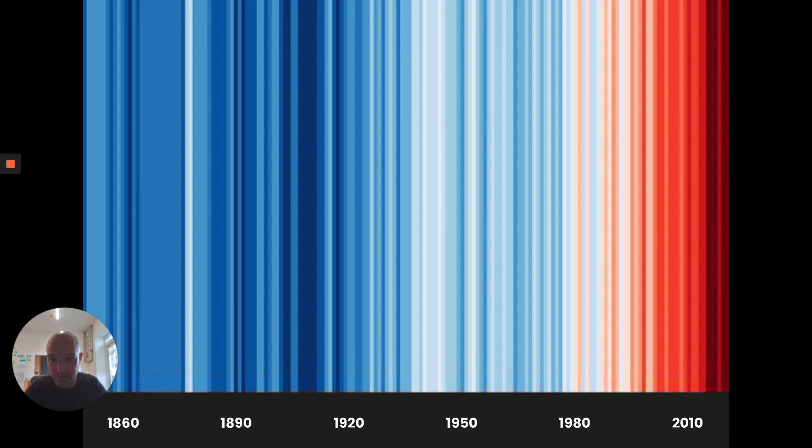Last year, we had the worst drought in Europe in over 500 years, leaving the continent scorched. And last week, we had the hottest day on record globally, followed by a new record hottest day, altogether making it the hottest week globally ever recorded. So climate change is beyond any shadow of a doubt real, and it's accelerating rapidly.

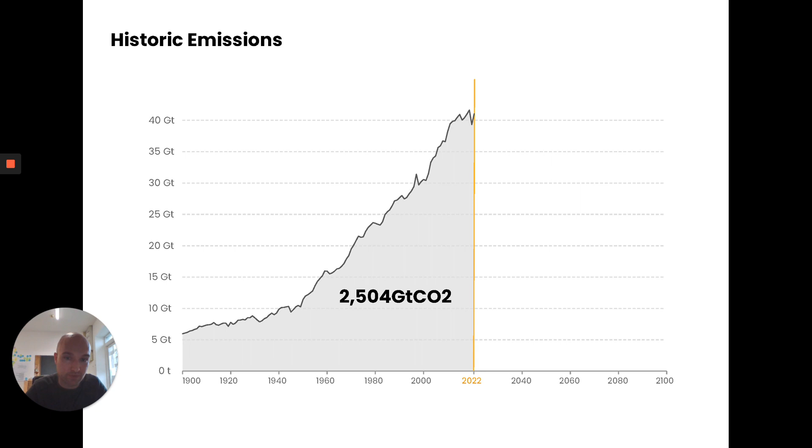The reason for this is that since the Industrial Revolution, we've pumped over 2,500 gigatons of CO2 into the atmosphere. At our current rate, according to the IPCC, we would exceed the 1.5 degree threshold, which is considered a minimum to minimize the worst effects of climate change, within 9 years. If we are to stay below that target, we need to rapidly decarbonize our society, across the globe. So we need rapid reductions in carbon outputs, basically globally becoming carbon neutral by around 2040, which is earlier, as you may be aware, than many of our targets and plans account for.

If everybody was to pollute and emit emissions the same way we do in Ireland, we would only have 5 years within which to exceed the 1.5 degree target, and 18 years to stay within the 2 degree target, which is, by all accounts, a sort of catastrophic depiction of the future. Relative to other European countries, we're the second highest emitter, and if you account for anomalies in the way Luxembourg's emissions are accounted, you could say that we're the worst emitter in Europe.

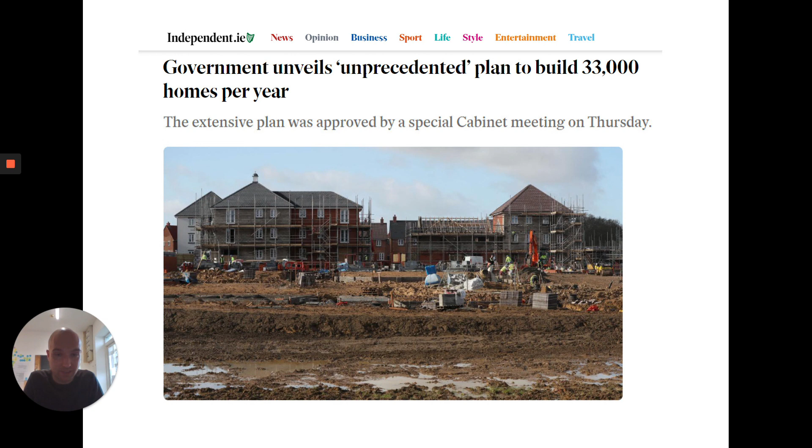with other estimations of up to 50 and even 60,000 between now and 2050 being needed. If we look at how we've built over the last decade, typically it has been the 3-bed semi-detached house, which contains around 40 tons of carbon. If we were to build that way in response to the housing crisis, that would be 33,000 homes per year using that typology, and over 8 years we would reach 10 million tons of carbon. So that's a huge output of carbon when we need to be dramatically reducing our emissions.

Now, in terms of transport and linked to the dispersed population that we have, we can see that Ireland has nearly 21 kilometres of road per 1,000 people. The European average is just under 10 kilometres per 1,000 people, and the German average is nearly 3 kilometres per 1,000 people. So by those figures, we're the highest in Europe, and we're the highest by a sizable margin.

Because of that, and because of a lack of public investment, our public transport provision is very poor in urban areas, but particularly in rural Ireland. Add to that the fact that we have some of the highest transport fares in the world, and that the service is unreliable, and it's no surprise that the Irish have the second highest car dependency in the EU.

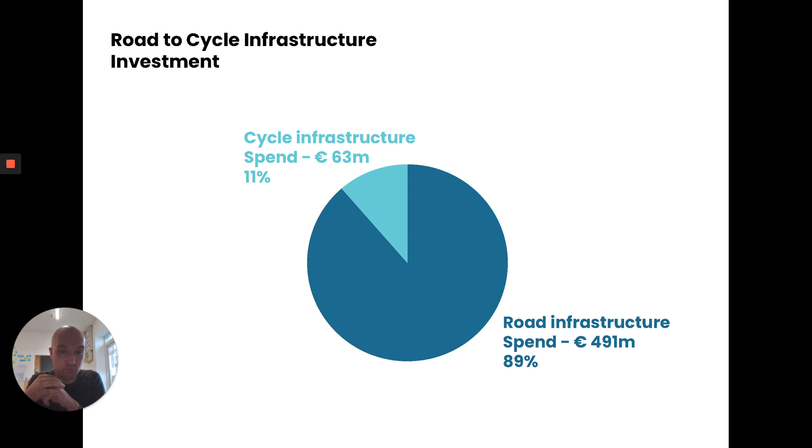Ireland's near 10% investment in road or cycle infrastructure is at a historic high, but despite that, only 40% of that funding was drawn down last year. So there's a mismatch between our climate ambitions, where we're putting money, and how that's being applied on the ground. As well as that, when we do build or consider cycle infrastructure, we often think of it as tourism infrastructure rather than essential mobility infrastructure.

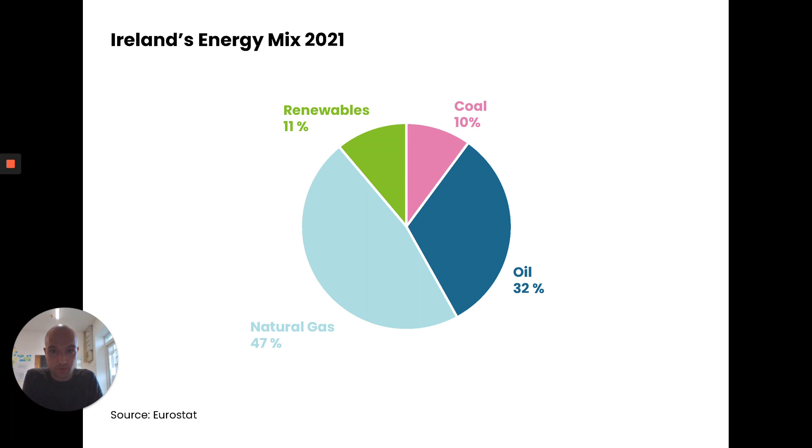The next point is energy. Having a look at our overall breakdown, we can see that 11% of our energy comes from renewables. To put that in context, in relation to our 2030 targets, we have some of the lowest application of that across the EU. That's despite the fact that we have some of the highest wind potential in the world, especially offshore.

We haven't seen a take-up in solar cooperatives the way we have in other European countries like the Netherlands or Germany, and these cooperatives can provide sustainable finance to local communities. We also see that the agriculture sector in terms of energy is being untapped relative to our European neighbours. The potential to increase anaerobic digestion should happen quickly and could have a major positive impact for our agricultural communities, also with the added benefit of reducing waste.

So the next topic, naturally moving on from that, is agriculture. If we look at Ireland's land use, 2% is artificial, so that's roads, buildings, other infrastructure. 13% is forest, and included within that are areas of nature or natural areas. 15% is wetland, 2% is water, and the remaining 67% is for agriculture. Of that, around 2% is used for vegetables, 4% for cereals, and the remaining 60% is for pasture or grassland, so that's for grazing sheep, for grazing cows, the larger livestock animals predominantly.

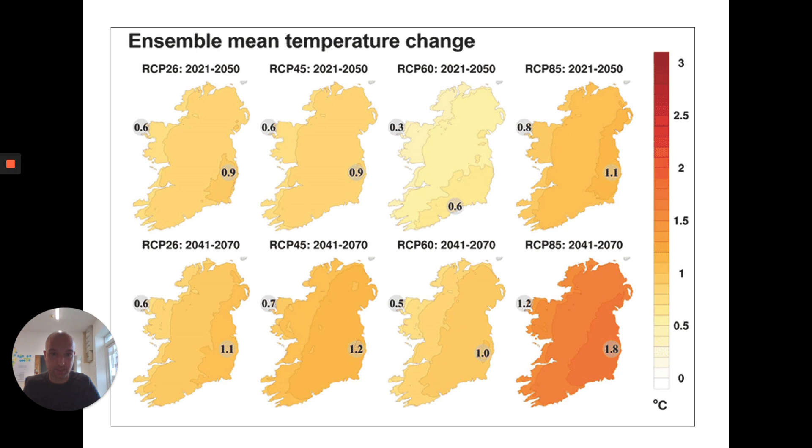We know that Ireland's temperature is rising at current rates. By the time we hit 2050, we'll have a similar annual temperature to what they have in Brittany in France. We're seeing radical and fast change in this space, and we will need to adapt to it. We also will need to adapt to the fact that population in Ireland is going to increase by about a third from 2017 to 2050, and that will be the second highest increase in Europe.

So where can we go from here? There are two major forms of practice: degenerative, harming the Earth's ecosystems and its ability to support life, and regenerative, repairing the Earth's ecosystems and its ability to support life. Within that, we have conventional, which is within the law. We have green, which is less negative impact. We have sustainable, which is doing no harm, also doing no good. We have restorative, which is contributing to nature, and we have regenerative, being part of nature.

We've taken those four key areas and given some examples of types of practice that could be considered degenerative or regenerative. Within degenerative, you might be surprised to see things like electric cars, public transport - once they consume a lot of materials and are extracted from the earth, they're degenerative. So even public transport, if that's not electric and renewable electric, is having a negative impact, albeit much less than car and private car transport.

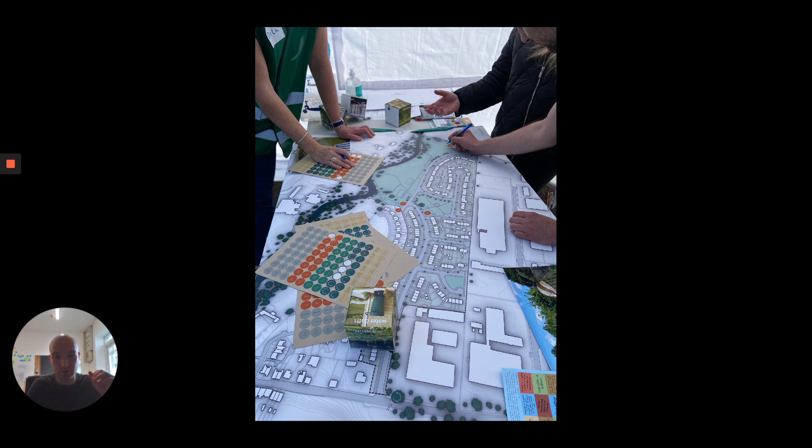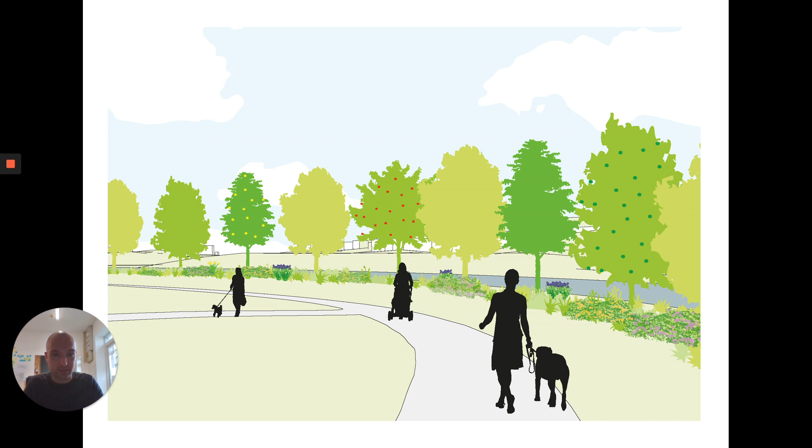We ran a number of co-design workshops, three in total, where the community engaged with us around the topic of climate change, highlighted the constraints and opportunities that existed within their estate to respond to it. We mapped all of those, and then the ideas that were developed, we produced visuals for them to communicate back to the residents what we had understood. These images were then taken and evaluated and eventually scored to understand what was going to work in the context of the housing estate and what was going to work for the residents.

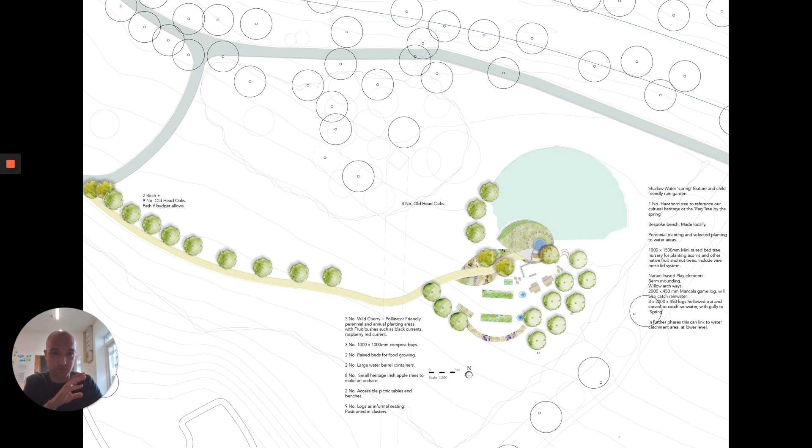Finally, two were shortlisted. They were evolved further, and that design was drawn up over a period of two months and constructed. This was a project of the community, building their knowledge and understanding of climate, but also responding to their needs.

This is how the project currently looks. You can see it's starting to wild out. We're getting pollinator plants blooming, we're retaining water on site, we've created public space, and we've also created the potential for the residents to grow collectively, and they've been taking that up.

The project was nominated for a new European Bauhaus Award, and amazingly, we were the first Irish winner of one of these awards under the category Reconnecting with Nature.

A site like this, which is in many ways common to a lot of Irish towns, has the potential for infill development, for reuse, for densification of our urban towns. The building itself was originally constructed in the 1920s, had a commercial space below with residential, the family living on top.

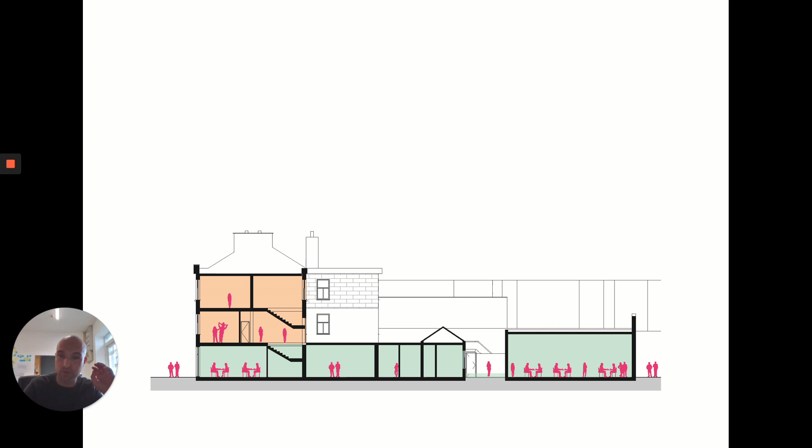The main moves we made urbanistically: on the ground floor, we can see that commercial space below is already active, so we extended that activation towards the old military barracks. We also brought back those above-shop units, so reusing the existing structure.

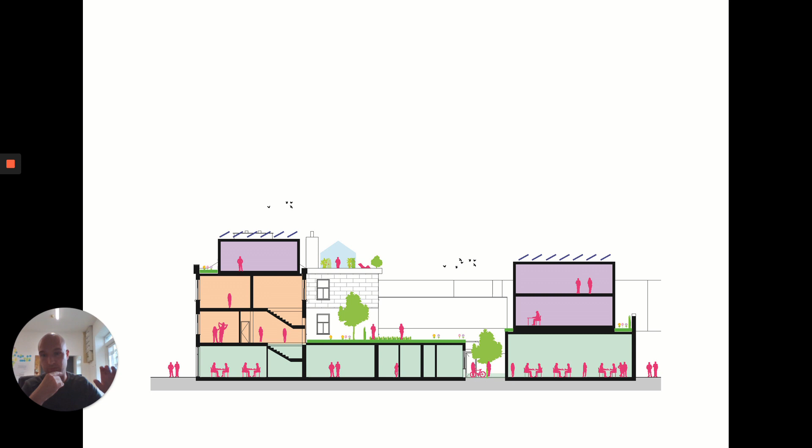In addition to that, we looked at bringing the qualities that people currently aspire to: the open space, the green areas, the potential to grow on site, and brought those into the centre of town. So you get a sort of vertical stack of urban to suburban as you move forward.

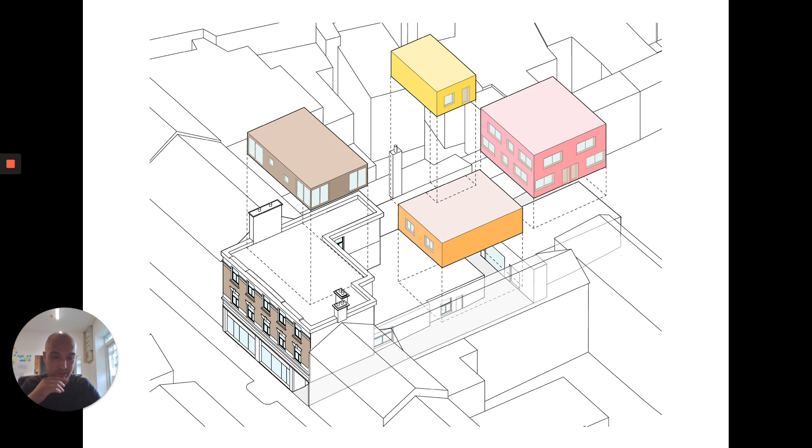We propose a new pedestrian connection through the site, bringing in multi-generational living units, so a variety of different types to support different age groups and people at different stages of life. And that's all connected through a network of green spaces with public amenities that the residents would share.

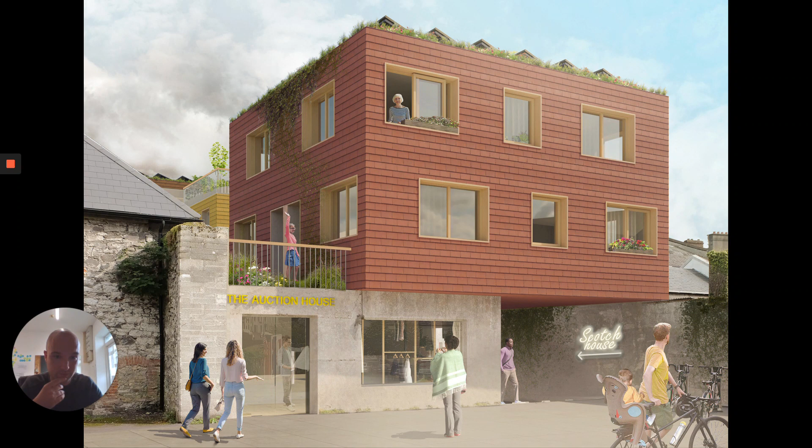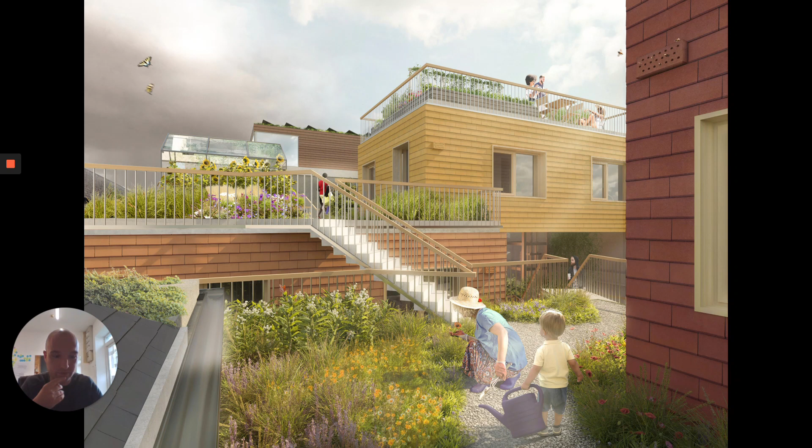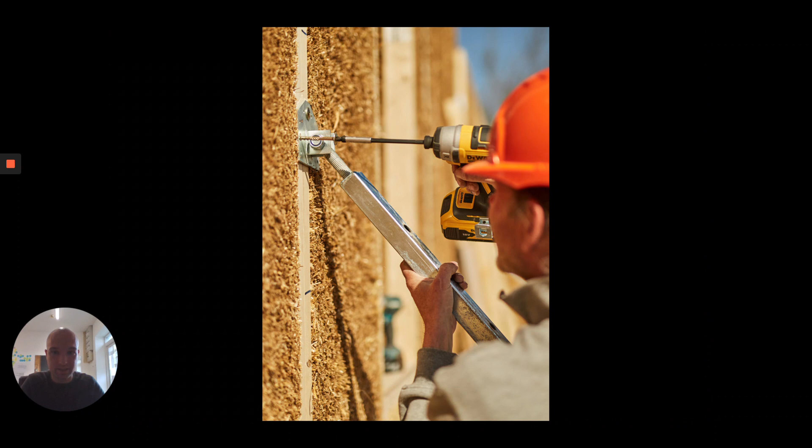This is a view from that military barracks site, a view from the laneway looking up, and some of those shared gardens. The project is proposed to be made out of a straw panel system that's easily mounted, put into place, and can be demounted, so the whole thing is potentially circular.

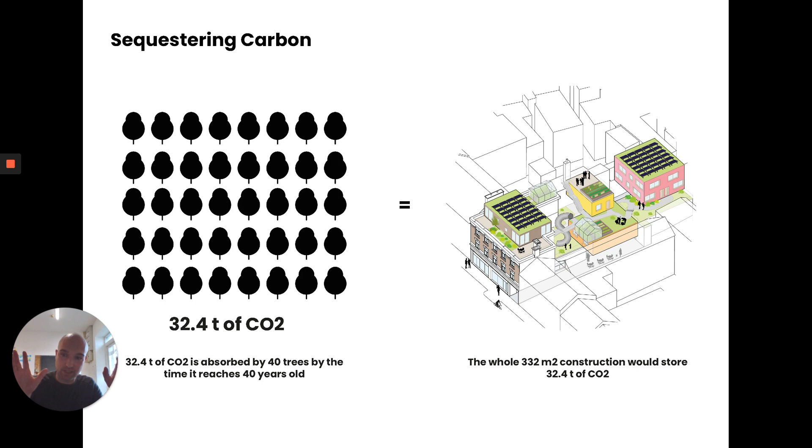In terms of carbon, the project sequesters around 32 tons of carbon in total. That's taking the panels, but all of the other elements of construction around it. It levels out at 32 tons of CO2 being stored, versus what would be around 400 tons of CO2 emitted had this been built out of block or concrete construction.

Even in terms of the finish, we were looking at the principle of circularity, linking to the historic context, but reinterpreting that clay material as a tile that can be reused in future.

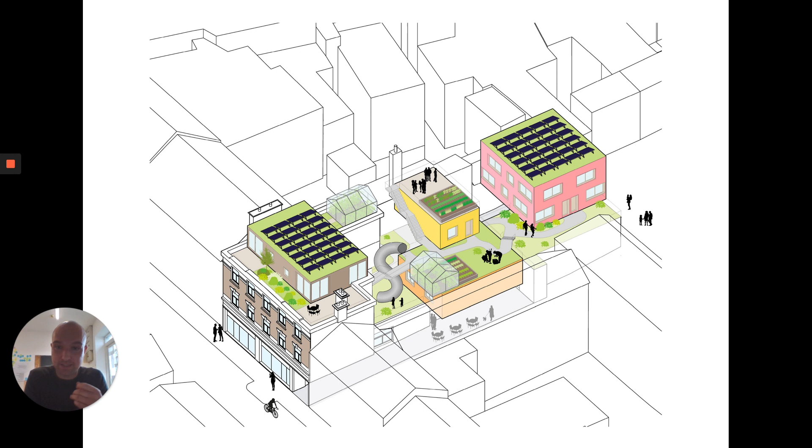For us, it was crucial not just to create a building that's sustainable, but facilitates a sustainable way of living. So we've proposed to reuse and activate the derelict floors, create renewable energy on site, have greenhouses and native plant species, create a new pedestrian laneway to encourage active travel, have vegetable growing on site, have shared gardens, of which we are 90% more than the shared space requirement, and build in a modular panelized system.

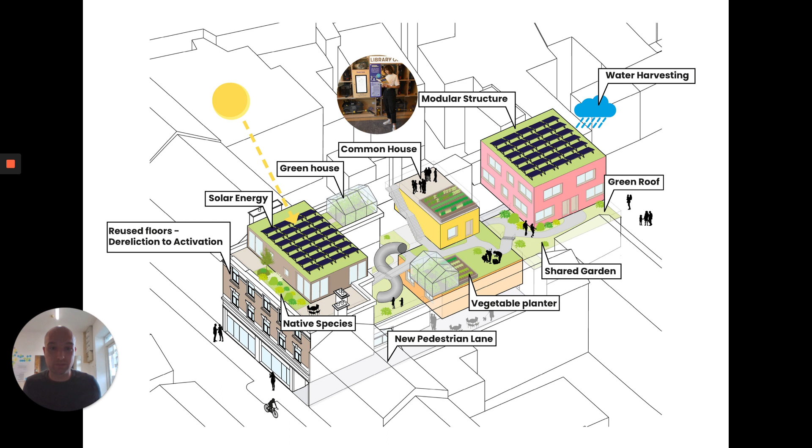Providing green roofs and rainwater harvesting, to have a common house which could be used by the community for different events or for remote working, and within that to have a library of things. So residents aren't just sharing space, they're also sharing equipment that they wouldn't need to individually buy. We're applying a more shared economy, circular economy approach.

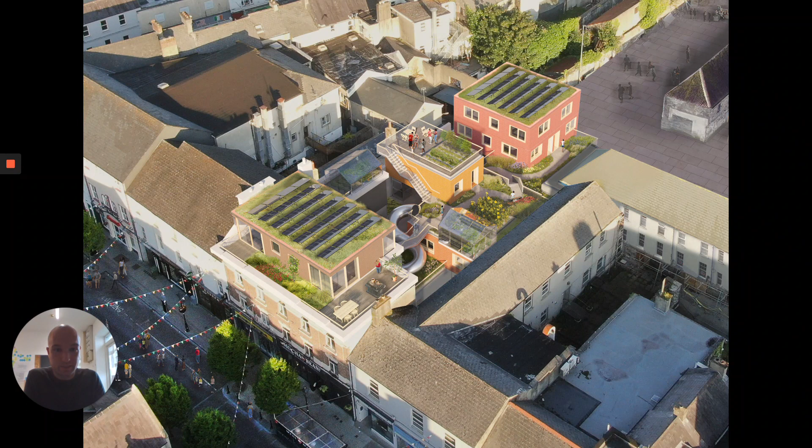This is a view out towards the military barracks development and an overview of the project, which is currently going through the planning system, and we're hoping to get a positive feedback and result on this.

Ireland's greenest town - so this is moving up a scale, still staying with Ballina. This is a project that is a collaboration between ourselves, the Mary Robinson Centre, the Chamber of Commerce, as well as other community groups that are driving a lot of the action behind it. The project looks at a people-centric Ballina, a circular Ballina, an ecological Ballina, a fit and mobile Ballina, and an energy-independent Ballina. We'll look at a few of those aspects through the presentation.

We analysed the town to understand where we were and where we are. In 1991, this was the footprint. This is the footprint in 2022, which is more or less the same as it was in 2008. So when we had the financial crash, that was the big growth period before that, between 1990 and 2008.

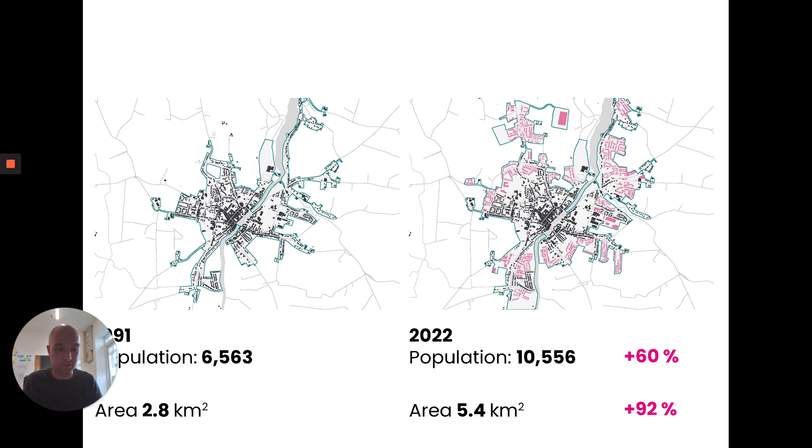Within that overview, we can see that the population has increased by 60% in that time, but the overall land area of the town has increased by 92%. So that tells us that we're living less densely, we're more dispersed, there's less people living in the centre of the town, and what we're creating is a sort of straitjacket around the town in terms of the way it naturally would have evolved. It's like ivy wrapping around a tree.

But within the town's core, we still have a 15-minute walk zone, a 5-minute cycle zone, so very easy to move around. On the wider ring, there's 30 minutes to walk from edge to centre, and a 10-minute cycle. All roads converge in the centre, which is no surprise, but a lot of the amenities of the town are on the periphery, so what that means is that everybody needs to move through the centre to go from one point to another. We have some connecting roads, and we have a lot of dead-end streets, and that's a marker of bad planning.

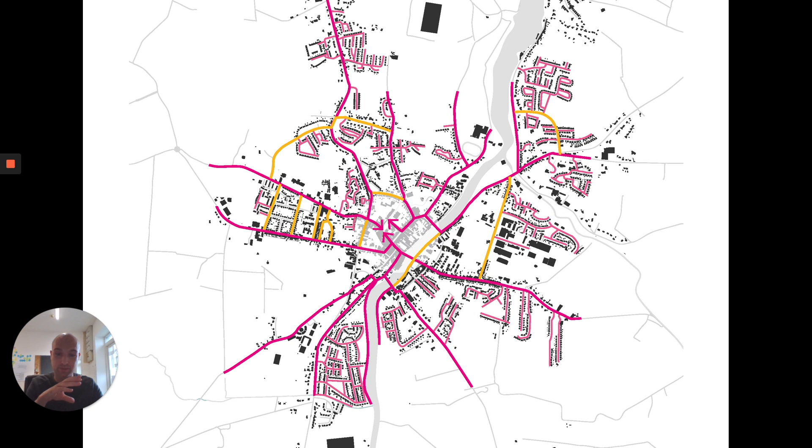You can see that there are 22 kilometres of main road, 5 kilometres of connecting road, and 30 kilometres of dead-end road. So we don't have a lack of infrastructure in town. We do have a lack of connectivity, and that is responsible for a lot of the congestion we see, especially during peak hours where there's traffic tailbacks on all main roads along the town.

To bring all of that together, we understand that the way the town has evolved is quite flawed in its planning, in its development and sprawl, but we do see the potential for this to become a pilot for the future. So the question we asked at the beginning was, how can we create a future-focused town that leads Ireland in the green transition? A town that's thriving at its heart, that implements all of the practices that we would want to see: the quality of space, the connectivity, inclusion, accessibility, to make a place that is livable and living.

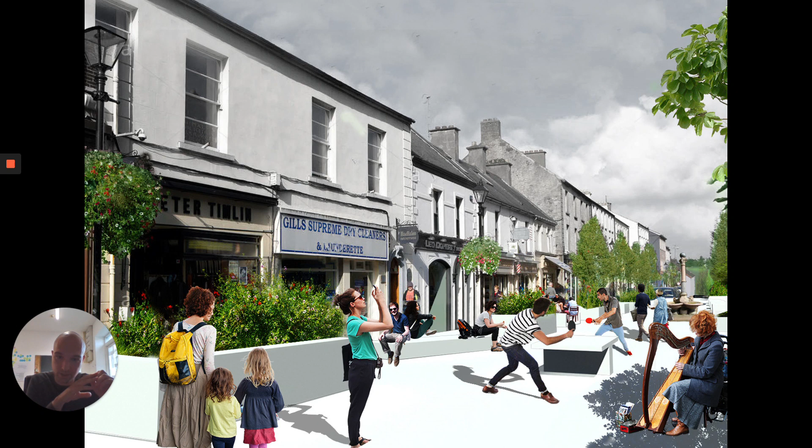How we might approach that: this is the main road in Ballina, Pearse Street. It's not needed as an essential connection, so it's a through road, but there's other ways to move around the town. So this could be pedestrianised. We could bring people into the heart of the town, not just looking at it as a commercial centre, but looking at it as a place for recreation, a place that would attract people to come and live, and to have the identity and the stories of the people of the town reflected in the urban fabric.

We also have a great network of laneways which currently act more as service routes than any sort of main circulation. But again, cleaning these up, we can make them attractive for people to move from point A to point B. We can program these spaces so that they're actually engaging, nice places to be. And with that, we can start to see the regeneration and reuse of the existing structures within the town.

Along the River Moy, along the waterfront, we can increase the biodiversity by managing those water's edges rather than having them cut down every month. During the summer, we can manage them to boost biodiversity and nature along the riverbanks. As well as that, we can bring people into this space and we can activate them.

Having green connective spines that run along the waterfront from outside to inside the town, potentially even with a solar canopy.

What this might do overall in terms of a strategy: all of the roads are leading towards the centre, which is very congested. We have a lot of the amenity space that people want to move to on the periphery. So by adding a few small additional pieces of infrastructure, we could create two peripheral loops of the town for walking and cycling.

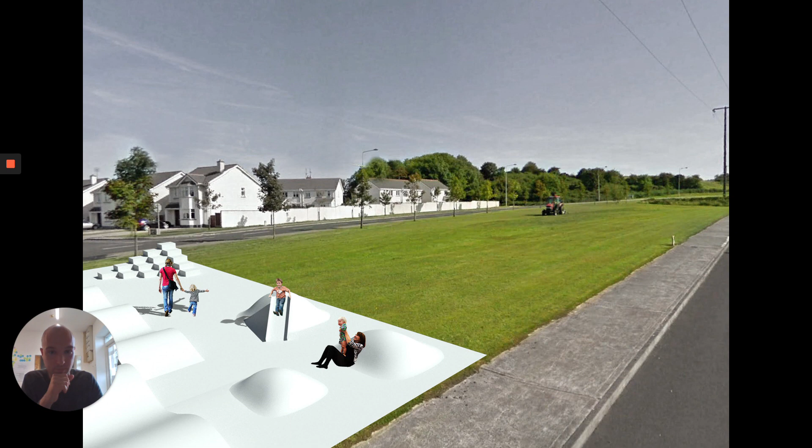In terms of green space, we already mentioned Ripple. This green space exists throughout Ballina and other towns. They can be improved to be more family friendly, to encourage activity and well-being, to grow produce on site, and to let nature back into our town centres.

Looking at our housing stock, in the 1930s and 1940s the state went on a huge house building project, and that was one of the main founding projects of the state.

If we were to take a similar approach to retrofitting, we could look at a lot of those houses that are essentially the same in terms of makeup. Using economies of scale, we can be much more efficient in retrofitting this old stock. A state construction company that massively scales up our retrofitting efforts would push us towards a decarbonised future.

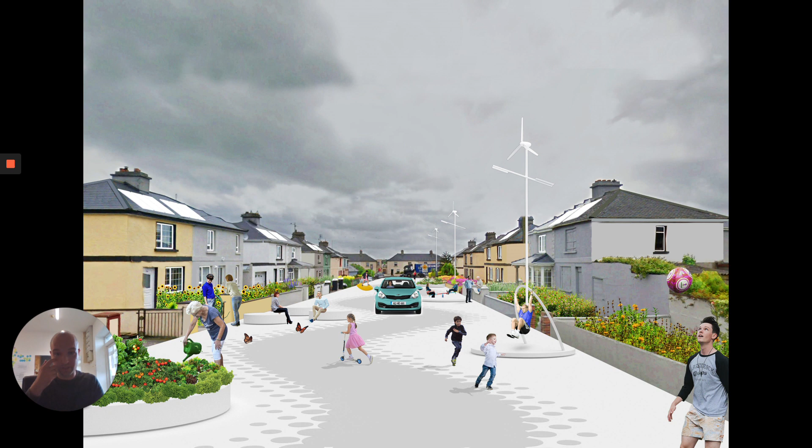We can also retrofit our infrastructure. We can encourage growth and biodiversity on site. We can change our roads from just being connectors to being shared spaces that mix connectivity with public functions. And we can bring nature back into the centre of our towns, using nature-based solutions to deal with water runoff, to increase pollination, and to create more beautiful spaces.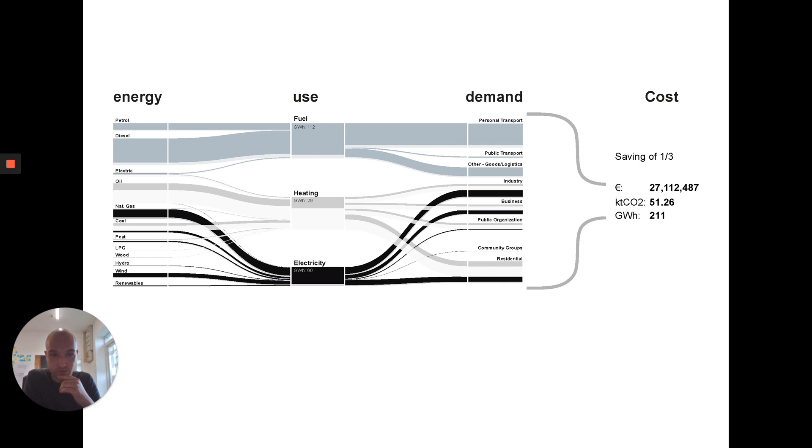Now to our energy. If we implement all those changes in retrofitting the existing building stock and changing habits in mobility, we could imagine a reduction of up to about a third of our energy use. If that was the case, we would have to find the remainder: 211 gigawatt hours of electricity, which would need to be renewable.

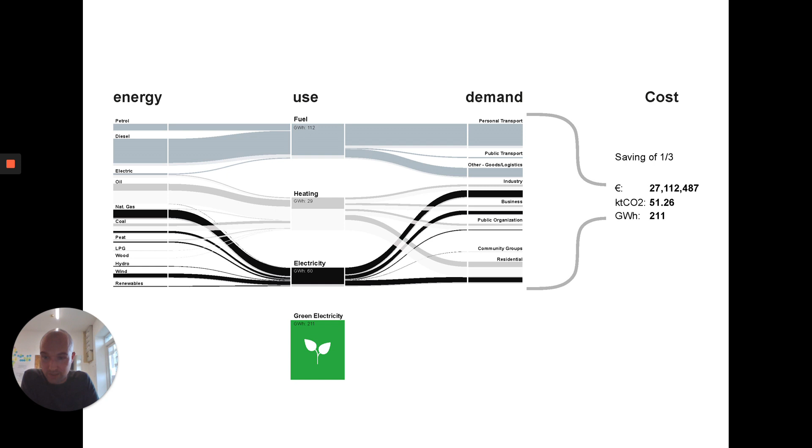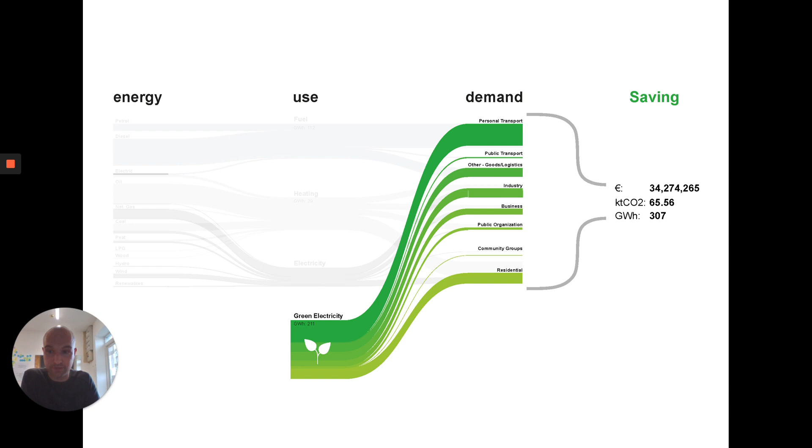If we were able to do that, and if it was in community ownership, we would move from having an expenditure of 34 million per year to having those savings. To achieve the target, you'd be looking at about 20 wind turbines, or covering the town potentially in PV.

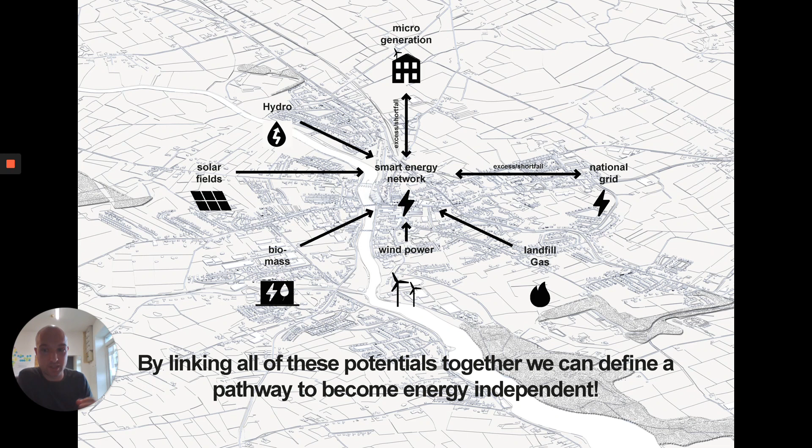What's most likely is a smart network of different options, maximizing the potential of hydro, which used to exist in the town, solar, even some biomass production, wind, landfill gas, using the anaerobic digestion capacity that could be created in this rural context, and also looking at the potential of district heating and cooling.

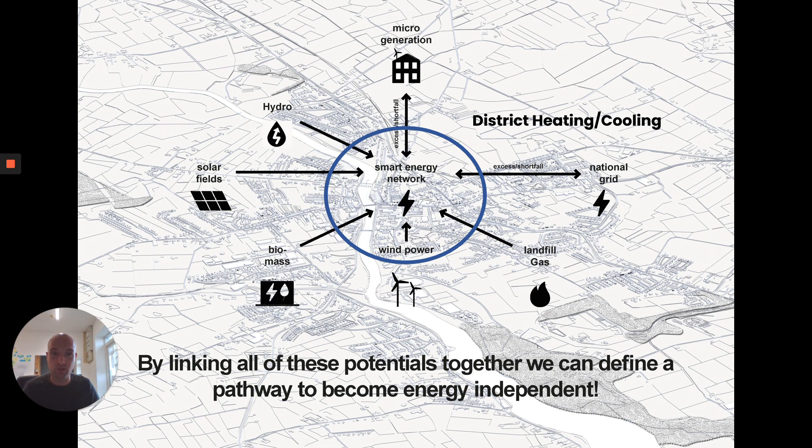If we're anyway going to upgrade all of our road infrastructure, and prioritize walking and cycling in building our roads to meet that, why not also use this as an opportunity to update our heating and cooling infrastructure to meet future challenges?

From a mobility perspective, Ballina is in the centre of a number of settlements. It's part of a network and it's the central node in that. A cycleway has been built from Killala to Ballina, giving a journey time of around 35 minutes. If we were to do that between all of the settlements, we would create a sustainable way of moving from Ballina to those other towns.

Within them, we could have mobility hubs which would act as transit zones from one mode of transport to another. So as people come from the countryside by car, ideally electric, they then transfer over to bike to move into town, or use a park and ride system or a local bus that's going frequently.

Especially in peak hours, we can substantially remove the amount of traffic going into the town and reduce emissions by having this transport network, this noding of different mobility hubs that would also connect to other settlements, acting as a transfer zone.

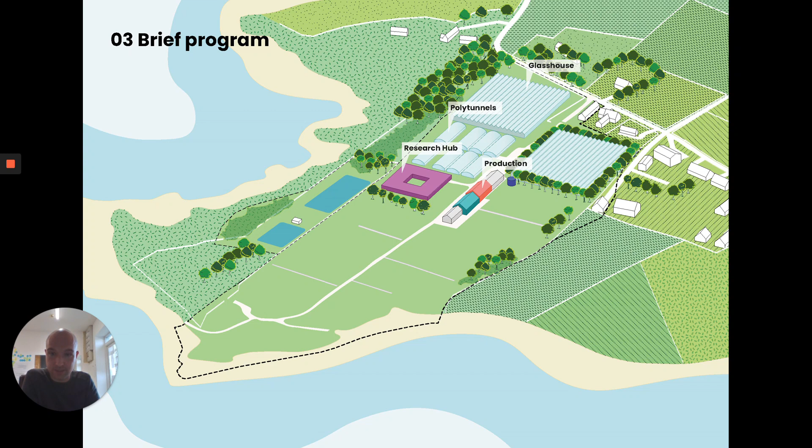As well as that, we have the fields that exist on site. But putting all of this together, we start to get something that's potentially quite intensive and maybe missing out on some of the room for nature that more local forms of agriculture leave. So could we create a model that is the best of both, efficient while also leaving room for nature?

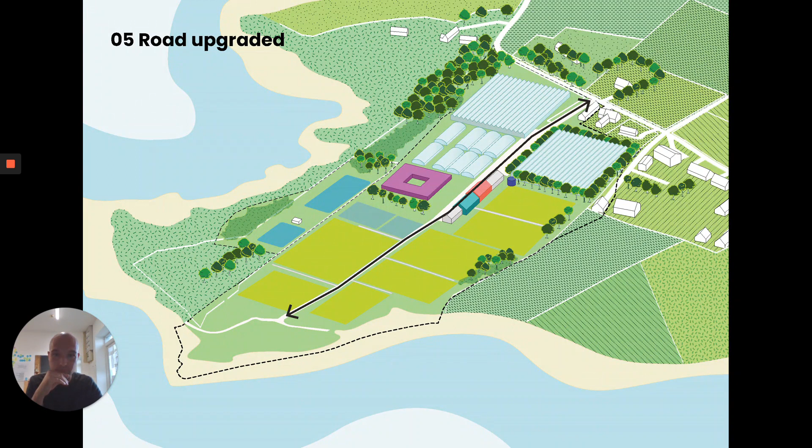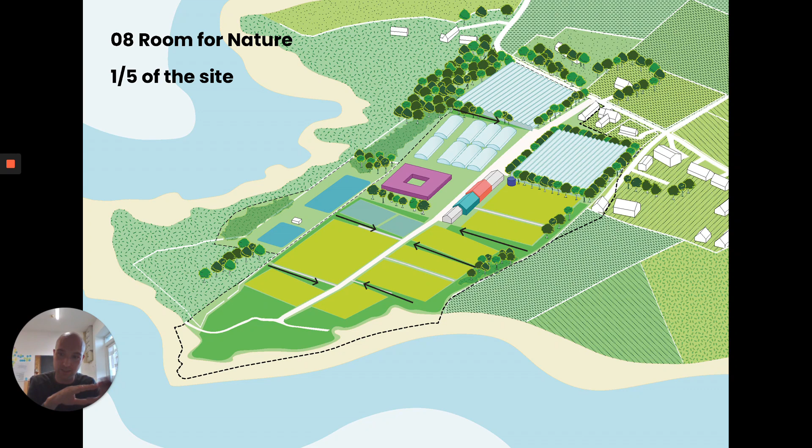To do this, we upgrade the existing road and we rotate the program to be perpendicular to this. That leaves over room for nature to infiltrate into the site. So we've really efficient areas of production, and then we've areas left over for that infiltration.

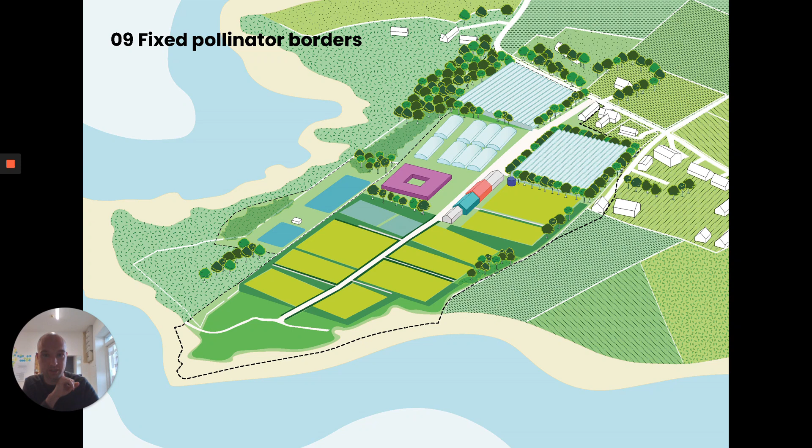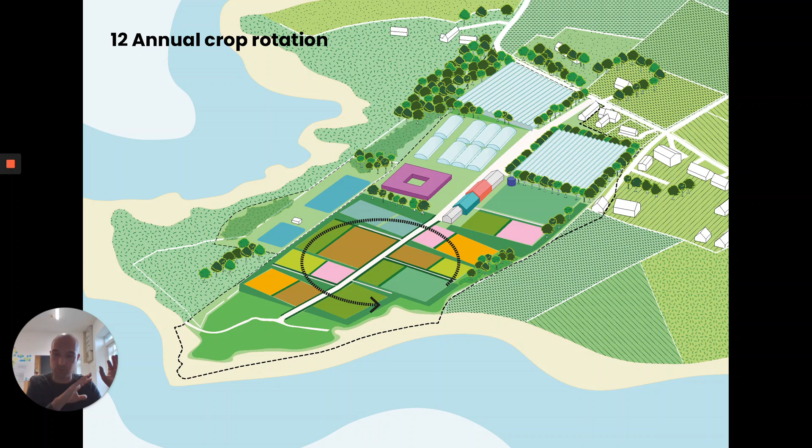We've developed room or habitat zones for the corncrake. We also have fixed pollinator borders, so offsets from those fields that are left towards pollinator plants. Then we have seasonal strips for pollinators, so these can shift as the different demand for crops changes. So within this we have regenerative crop farming that, using the principle of crop rotation, can be adjusted depending on yearly need.

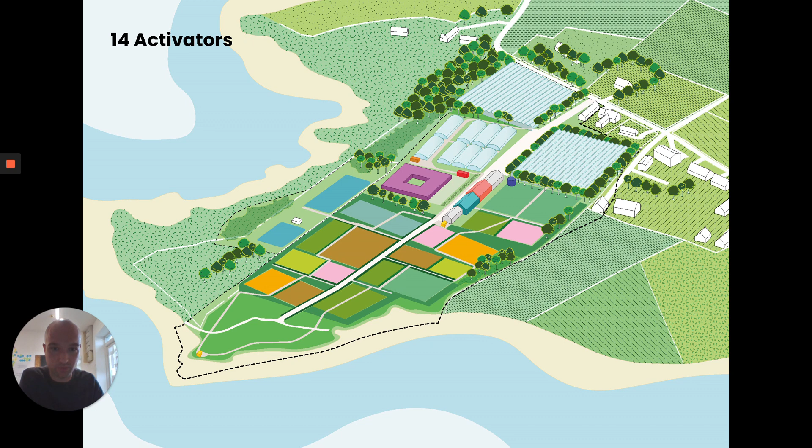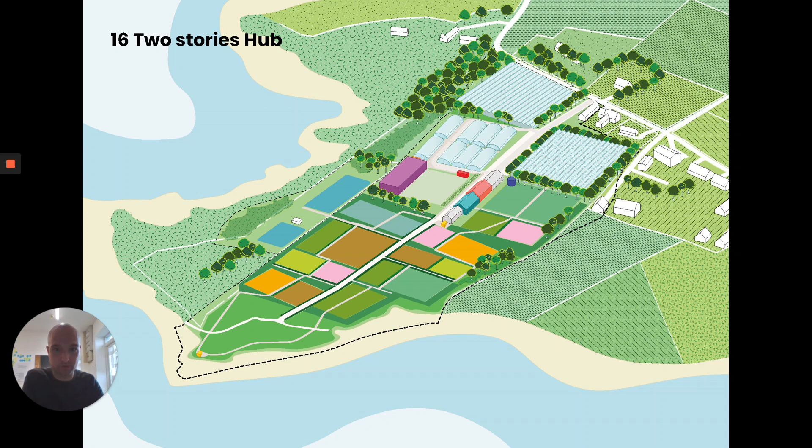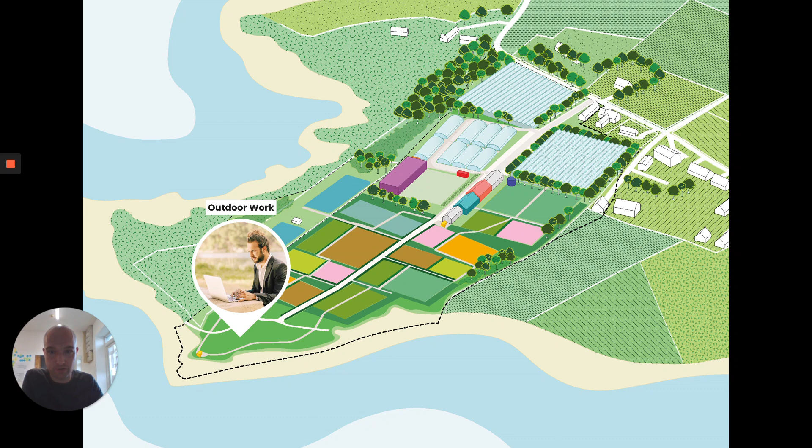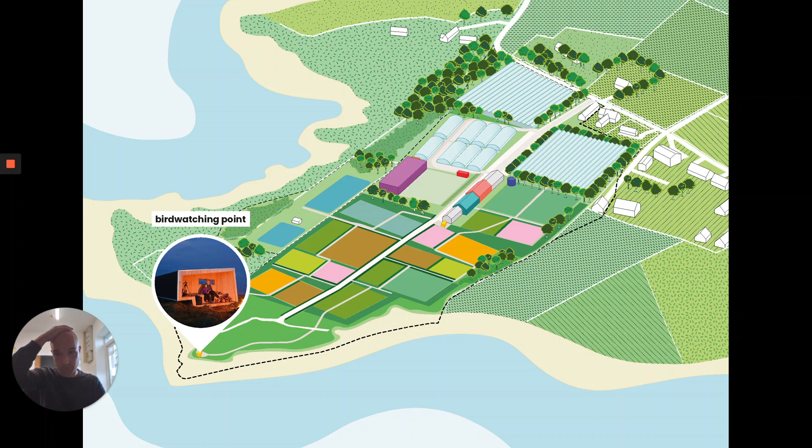All of this is linked together with a landscape loop path, creating a showcase for the bioeconomy with various activators, traffic drop-off, moving the project to a two-story development, which we're currently evolving. Within this, we will have events, research capacity, educational spaces, an apiary. We will have space for heritage demonstration, capacity to work outside, nature educational points, places and habitat for nature and educational trail, bird watching, EV charging zone.

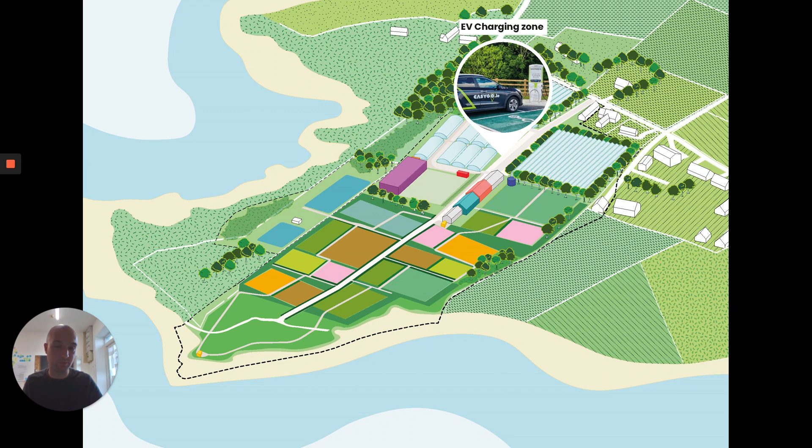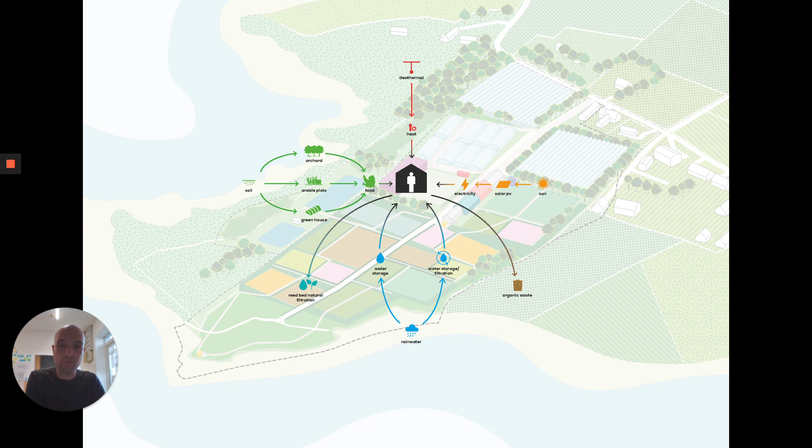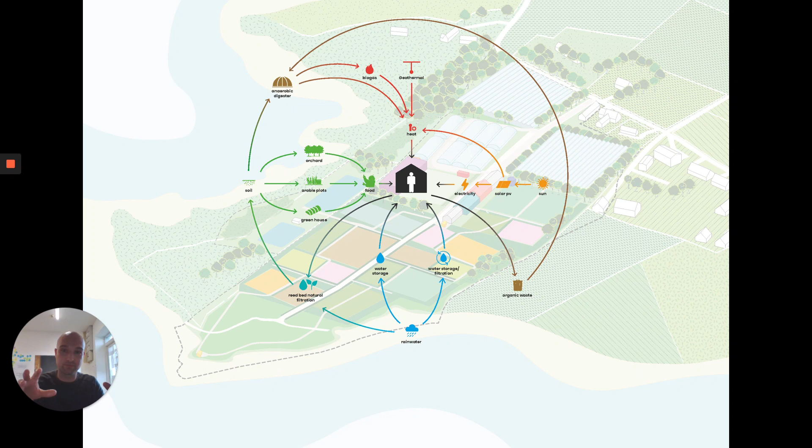We're required to provide a minimal amount of parking, and we do that as electric EV with the expectation that it reduces as we move forward with higher usage of public transport, which we're providing drop-offs for, and bike infrastructure. We're also currently developing the operational strategy: how we get energy from the sun, how rainwater is harvested on site, how the soil produces food used on site, the potential to heat the greenhouses through geothermal energy, and then taking the waste from all of these processes and tying them into a circular system that minimizes waste.

Can we imagine a regenerative Ireland? Using all of those principles, do they give us the basis for what a regenerative future might be? The next step is to try and build on those and see where we can go.

We also have freight lines that are currently not used for passenger traffic, as well as old lines that could be brought back into use. By adding around 20% to that network, we could create a fairly extensive coverage of the country.

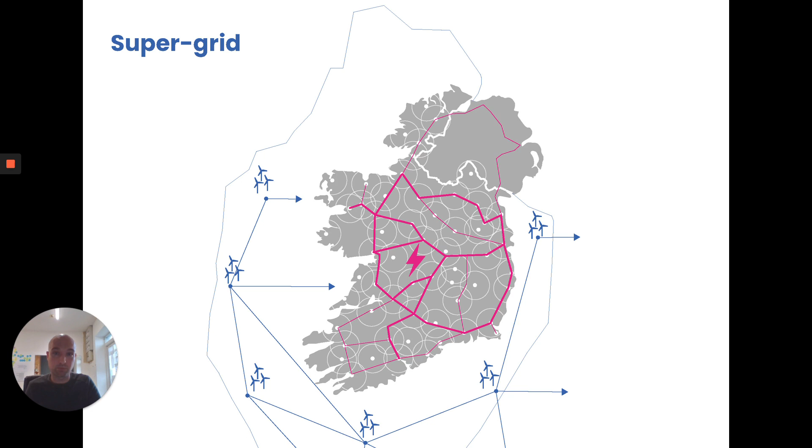So if this system is electric, you provide sustainable alternatives to car dependency. That electricity can be powered by the supergrid, which there are already plans for, and if that grid is extended, we can fulfill the real capacity of 50 million plus homes, producing more than enough energy for ourselves and also the ability to sell that back to Europe.

But we also want independent energy production, because we want communities to benefit from the transition. So having energy co-ops and local biogas production, which will also reduce waste, creating circular models of waste disposal and energy production.

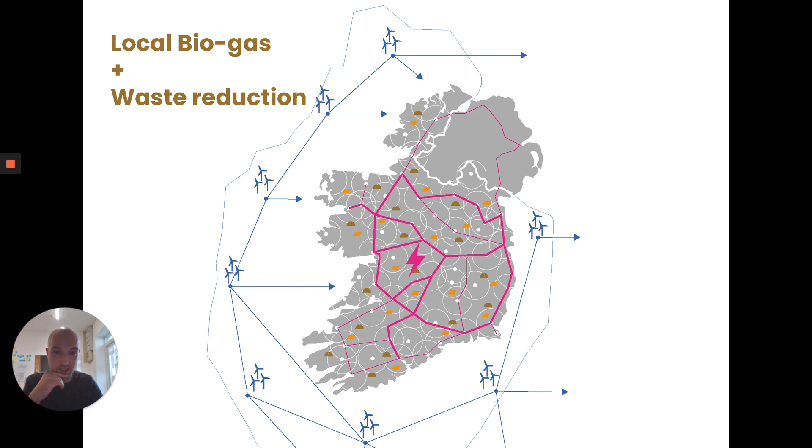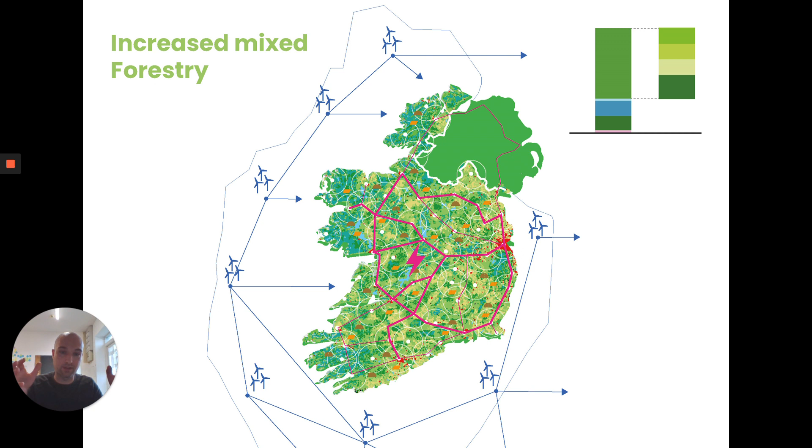Changing our land use to become more diverse, so we can increase our vegetable and crop production, increase mixed forestry - managed forestry that provides timber as an output but over longer periods of time, introducing a variety of native species giving a positive nature value contribution. All of this creates more resources for the bioeconomy and more sustainable building products.

We could still export 40% of what's produced on that grassland while meeting our own internal demand, and export 80% of the vegetables and crops we produce while still meeting internal demand.

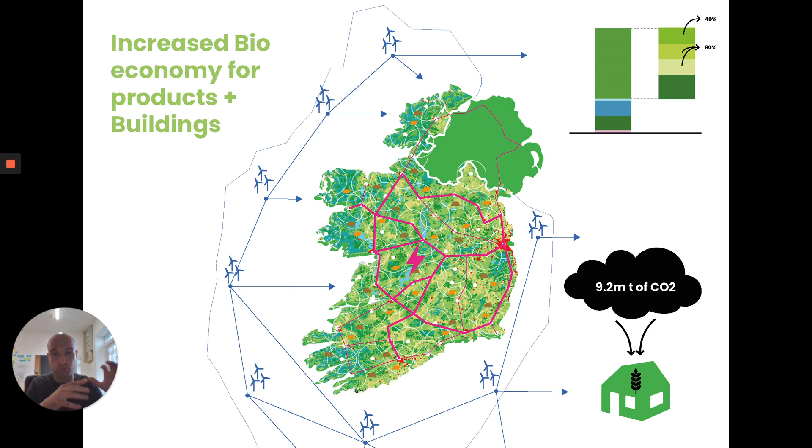And if we were to take the waste product - straw or hemp or any type of fast-growing biomaterial - rather than pumping 9.2 million tons of CO2 into the atmosphere to meet our housing targets, we could sequester that. We create a product that local farmers can sell. It's locally produced, it sequesters carbon, and it helps provide warm, comfortable environments for people to live in.

And then we can have increased nature. Because we have more productive forms of land use, you can give over space for nature. In this proposal, we have 30% designated totally as nature and 20% as nature value - woodland areas that can have a commercial purpose but are also built to add value to nature.

Can we create a regenerative Ireland that is more collaborative, more local, more inclusive, more equitable, more diverse, more natural, more healthy, more active, more playful, more cultural, more beautiful? This is our ambition and our hope for the future.